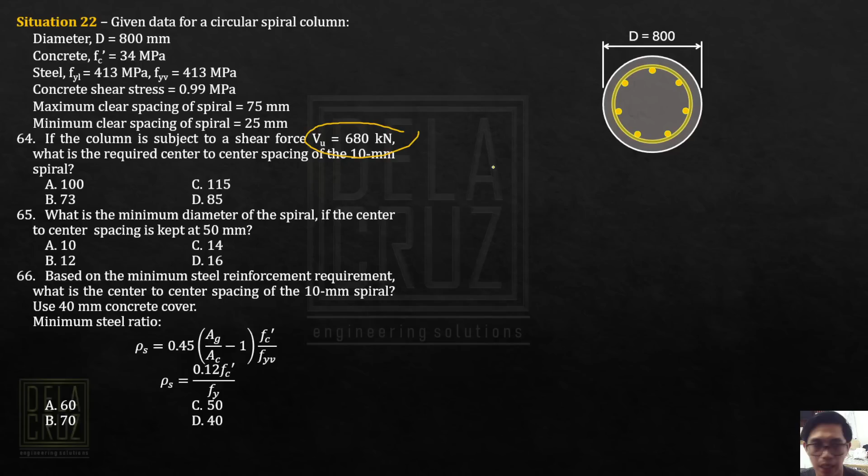The spiral is 800 mm in diameter, a circular spiral. If the column is subject to a shear force of 680 kilonewtons, what is the required center-to-center spacing of a 10 mm spiral? Spacing is what is being asked.

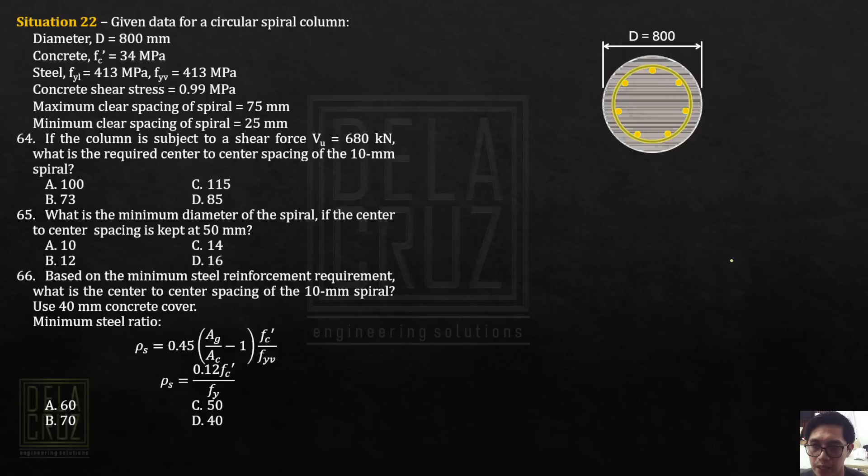So the spacing here in the spiral, the proper term if we read it in the code, is called pitch - the center-to-center spacing. These are our longitudinal bars. The spiral is a continuous reinforcement. This is what it refers to as spacing, S or pitch. The proper term in the code is pitch.

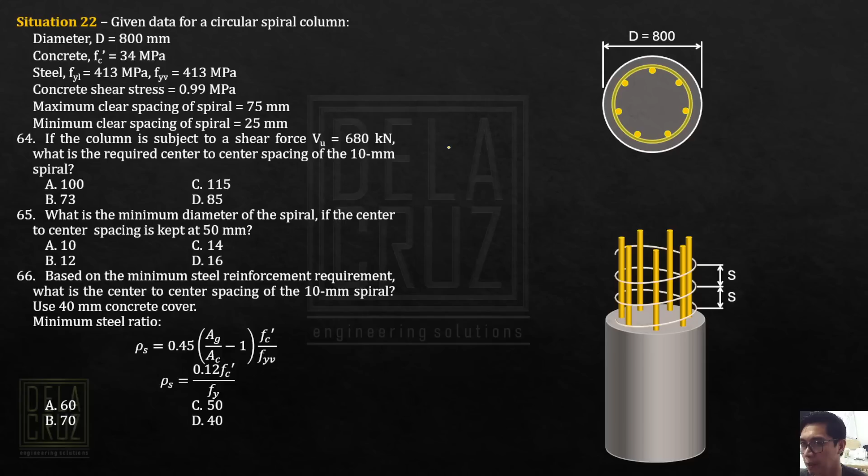It's the same as designing the spacing of ties, even for rectangular sections. You need VC, then VS - these are really what's involved here. In VS, the spacing is involved, which is AV, FY, D over S. This is based on shear strength.

So the flow, for number 64, the flow of the solution, you need VC and VS. For calculation of VC and VS in a solid circular section, the effective depth shall be permitted to be taken as 0.8 times the diameter.

So it's not the effective depth we usually use, not total diameter minus clear cover - it's not like that. According to this section of the NSCP, it is permitted to be taken as 0.8 times the diameter. While BW is permitted to be taken as the diameter. So BW is 800, the diameter of the spiral column. The effective depth shall be taken as 0.8 times the diameter, which is 800.

So define these values first so you don't get lost. Then the concrete shear strength - this is the flow of designing the spacing based on shear. It is FVC, that is concrete shear stress times BWD. So this is 0.99, BW is 800, effective depth is 640. The result here is in newtons.

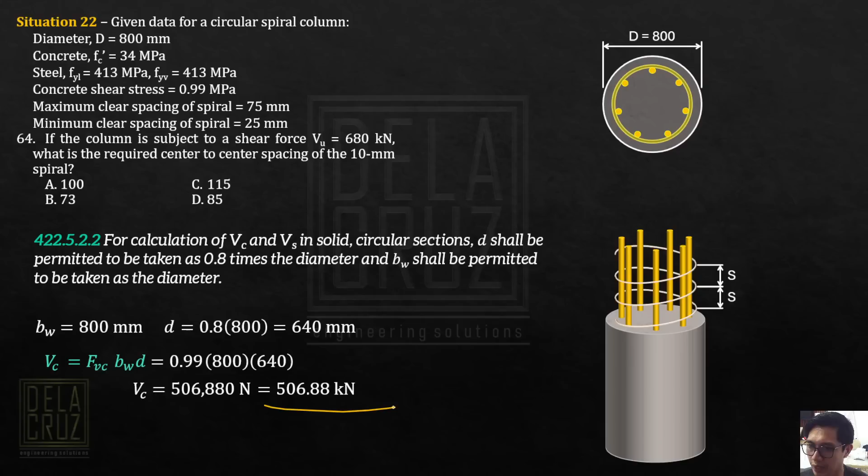Convert to kilonewtons by dividing by 1,000. The spacing is involved in the formula for VS. So this is what happens. Let's go back to our main criteria: the factored shear must not exceed the design shear strength. This is V. These two together, that is VN, what we call the design shear strength.

So our VS, that is why you see this formula. For simplicity, let's make it an equality. That becomes VU over phi, then minus VC. That is why this is the formula we see - even in NSCP, this is the formula. So it comes from this inequality. For simplicity, let's make it equal.

So VU is 680. Phi for shear, by the way, is not given here. But the strength reduction factor for shear is 0.75. VC is 506.88. So we have the required VS - this is what we need.

Now in our formula, we need AV. For each circular tie or spiral, as long as it's circular, AV shall be 2 times the area of the bar within the spacing S. Since our spacing is here, right? VS - let's just cross multiply. So our AV is 2 times.

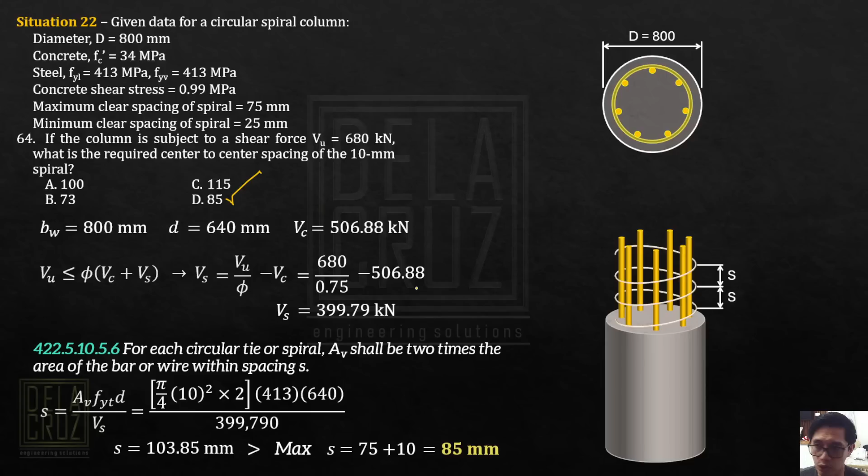Second question. What is the minimum diameter of the spiral if the center-to-center spacing is kept at 50 millimeters?

Walang criteria dito, no? Kung babasahin natin, wala siyang binigay na criteria na pagbabasihan. So sa tingin ko dito, ito yung ginawa, no?

Sa pangatlong tanong, may binigay siyang formula para sa minimum steel ratio. I think yung number 65 is based din dito. Kasi kung magde-design tayo, dapat may criteria, lahat ng criteria is i-check. So I think ang spacing dito, for that, ang diameter dyan is masosolve using this, the minimum steel reinforcement ratio. So I will solve for this muna, then later on mai-involve yung diameter.

Paano ba yung magiging flow? Okay, so ito yung magiging flow ng calculation po natin. Yan, so kunin muna natin ang minimum steel ratio.

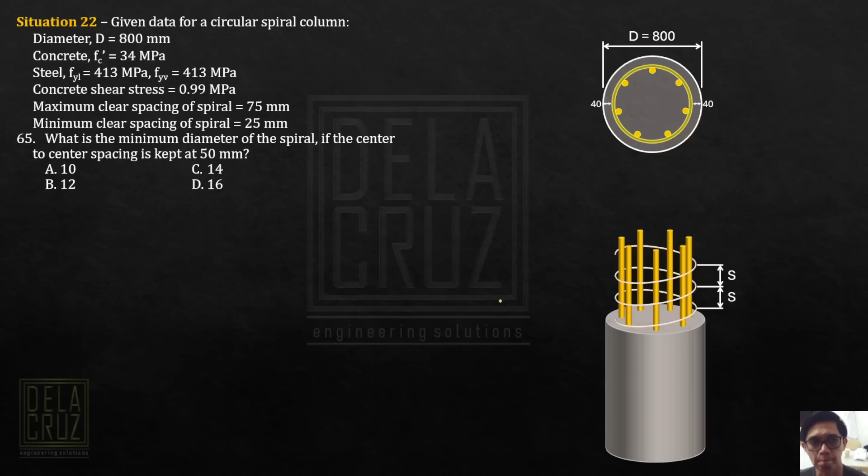Kasi pinapahanap minimum diameter, doon sa formula natin involve ang DC, diameter of core. Ito po yung ibig sabihin ng diameter of core. The clear cover is 40. This time magagamit na po yung clear cover natin na 40 millimeters.

Okay, so as you can see in the data, notice sa data natin, wala siya dito, hindi naka-indicate yung clear cover, pero andito, use 40 mm clear cover. So again, may time sa problem sa board exam na ang data na kailangan, isa dito pa sa pangatlong question, meron ganyan. At you may memorize this one for columns na usually ang ginagamit, ang minimum clear cover is 40.

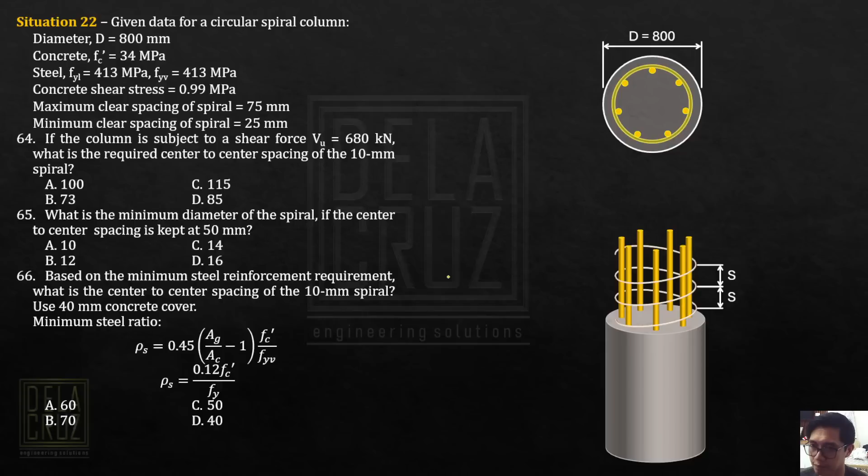Alright, so kukunin po natin yung DC. Ito yung DC, diameter of core. That is 800 minus 2(40). Core diameter, dito yan, outer to outer face of this spiral. Ito po yung spiral natin.

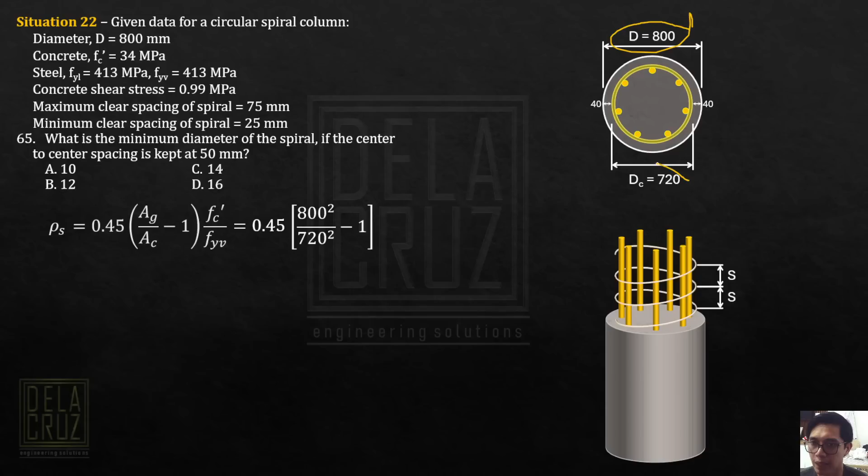Okay, so sa formula natin, you have two formulas. Let us apply the two formulas. So 0.45, ang AG, that is the gross area of the concrete. Okay, ang AC is the area of the core circle. Now ginamit ko na lang diameter squared, instead na meron pa yung pi over 4 kasi circle yan, no? Then meron din pi over 4 sa baba, magka-cancel lang sila, so tinanggal ko na lang. So instead, I have here diameter squared over diameter squared, minus 1. FC prime is 34, FYV is 413. Ito yung ating sa first formula.

Dalawang formula natin, the second formula is 0.12 FC prime over FY. Ito po yung makuha. Now, ang gagamitin natin dito, hindi siya indicated sa board exam, no? Pero basta minimum steel ratio, given two formulas, you will always use the larger value, yung mas malaki sa minimum steel ratio. Remember that one, no? Kahit doon sa longitudinal bars natin sa beams, meron niya sinabi sa code na larger of the two, the minimum reinforcement is the larger of the two. So you will use this one.

Tatanungin niyo, Sir, saan involve yung diameter ng spiral? Now, this is the minimum required steel ratio, minimum po yan, so dapat di pwede bababa niyan.

Ang volumetric spiral ratio para dito, yung actual, galing sa actual, ang formula is, the general formula is the volume of the spiral within spacing S over the volume of the core within the spacing S. This is the general calculation. So bale, ito po yung formula natin.

Ang approximate volume ng spiral sa isang buong turn, that is AS, area ng spiral, AS, pi times DC minus DS. So parang ano po siya? Area times length. Ito kasi, it is the circumference of one turn. It is neglecting the increment, tawag dito, kasi ito pa yan, isang buong ikot pa ganyan. So gineglect dito yung space in calculating the volume, gineglect yung space, yung isang space. Kasi napakaliit ng difference niya, no?

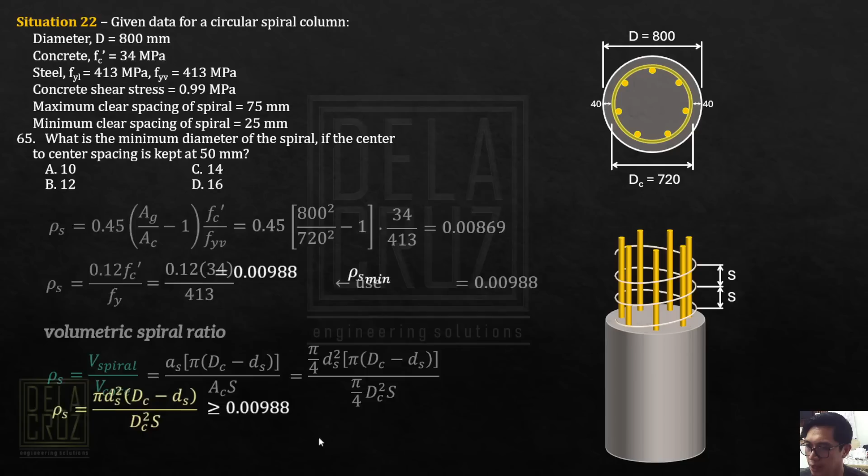Okay, so dito po natin makukuha ang diameter ng spiral. Substitute natin, diameter ng spiral unknown. Ang DC 720, diameter spiral unknown. Ang spacing is kept at 50 millimeters. Must be greater or equal to 0.00988.

You'll get here an inequality. DS must be greater or equal to 10.72. Dali lang, it is greater or equal to 10.72.

So according to this, minimum diameter, no? So that is the minimum required diameter. Kung minimum required diameter yan, ang pipiliin natin sa choice, based lang sa statement, hindi pwedeng bumaba, minimum, hindi pwedeng bumaba sa 10.72. So we will not choose 10, no? Instead, yung next whole number is pinaka-applicable.

You have here 12 millimeters. Again, kung babasihan natin sa inequality, ito yung minimum. You get here minimum required diameter. Our answer will be 12. Actually pwede mong i-trial and error, no? Dapat ang ratio natin, ng steel ratio, di bababa sa minimum.

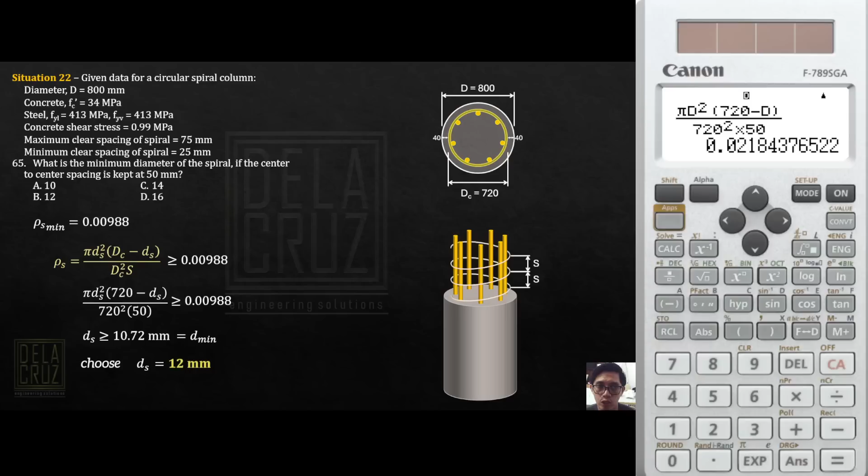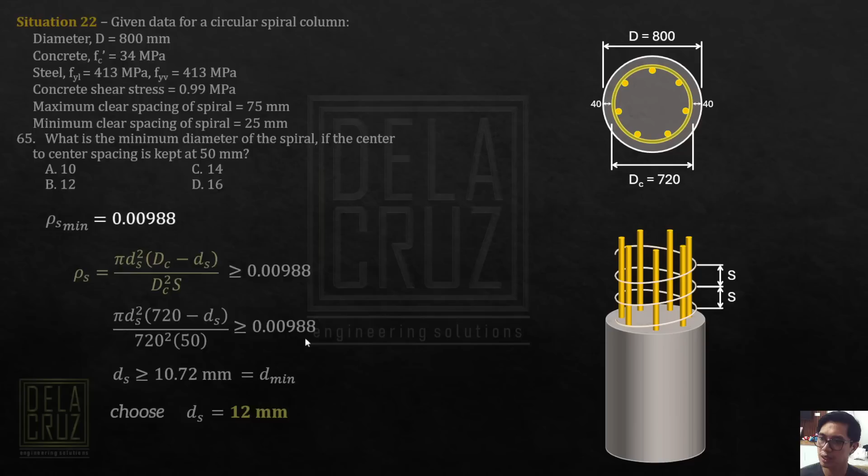So I will choose here 12 correctly na based sa ating inequality. That is the most appropriate diameter based on this minimum steel ratio. Okay? So sa number 66, based on minimum steel reinforcement requirement, sinabi niya na dito, what is the center-to-center spacing of the spiral? At this time, applicable pa rin yung ating formula, yung na-derive natin na formula.

Diretso na tayo doon sa ating formula. So what will happen? So diba, ito yung ating formula na-derive. So baliktad na po siya. Ang tanong dito is spacing, what is the center-to-center spacing? Ito na, gagamitin natin ito.

Again, the same inequality po kanina. Alright? So ito po yung mangyayari. Dapat hindi siya lumagpas, hindi siya bababa ng 0.00988. That is for your minimum. This actual must not be less than the minimum steel ratio. Again, baliktad na po, may diameter ng spiral this time. Okay, spacing ang unknown, then dapat di siya lumagpas ng 0.00988.

Baliktad lang yung animation ko dito, sandali lang. So di siya lumagpas, bababa ng 0.00988. So with this, kuha mo yung ating spacing. Nakuha natin yung required spacing dito.

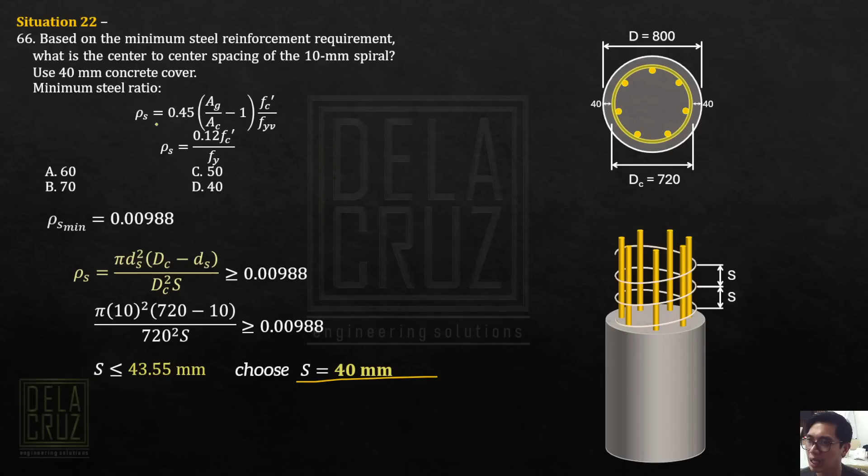Kinorek ko lang yung animation, yung pagkakasunod na nagka-rumble kasi. So again, ayan, must be greater than this. Kuha mo yung spacing. Ito po yung inequality, no? The spacing must be less than or equal to 43.55. Take note, spacing po yan. You will round down to the nearest whole number. So yung pinaka-appropriate dito is 40 millimeters.